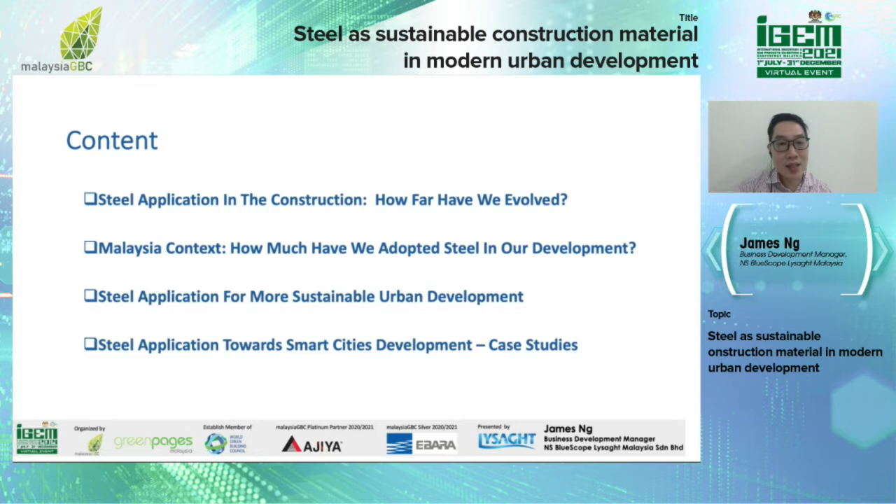These are the four contents that I'm going to share. First, steel application in construction and how far we have evolved. Second, the context of how much we adopt steel in our development. Third, more sustainable urban development. Fourth, steel application towards smart city development. Then I will share some case studies of how Malaysia is moving in this direction.

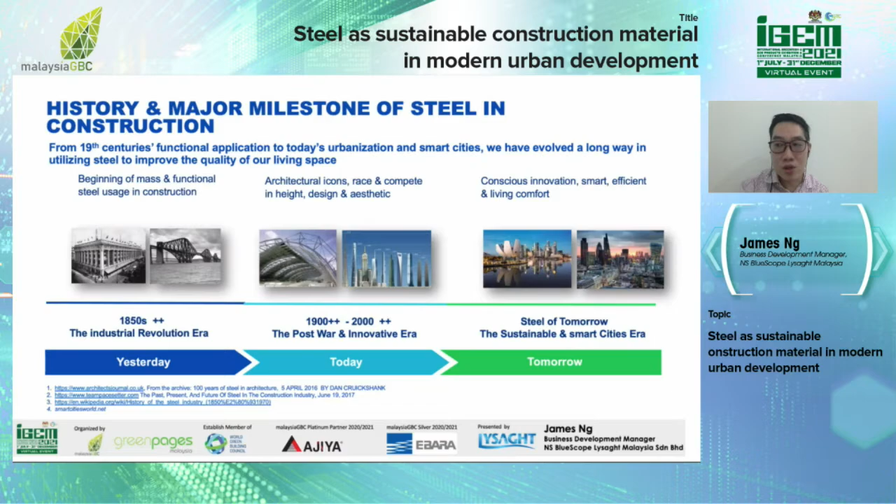First, steel application in construction, how far we have changed from the past until now. From the 1850s, we used steel more in infrastructure. Then from the 1900s, building development started involving steel structures. Now we are using more and more steel in the industry.

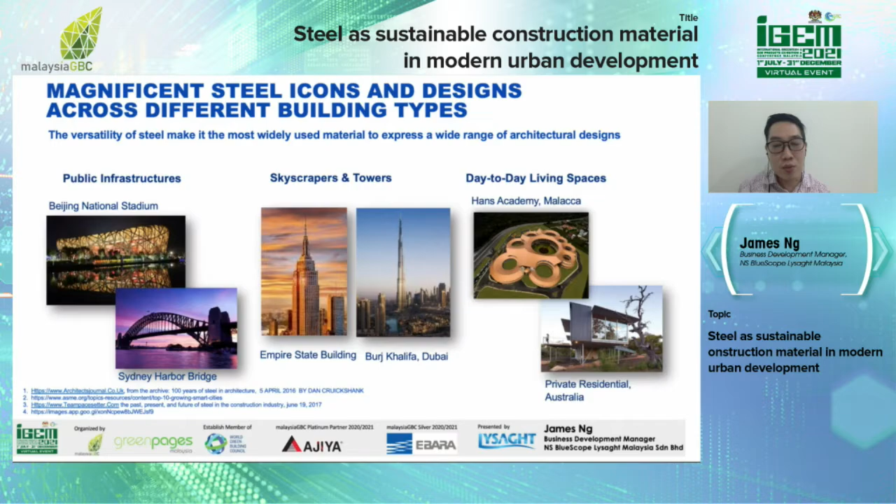Next topic: how much we adopt steel in our development. In the olden days, the kampong traditional generation, only corrugated metal roofs were used, along with timber trusses and timber door frames.

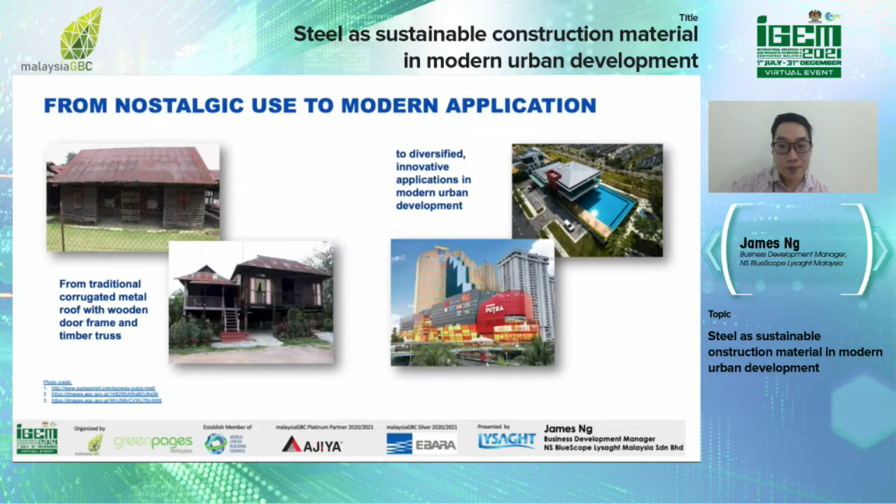Now in the modern generation, we have changed everything into steel material. The reason for this change is because steel has certain advantages, such as anti-termite properties. Steel material can be used in trusses, steel framing, floor decking, louvers, fencing, door frames, ceilings, facades, and so on.

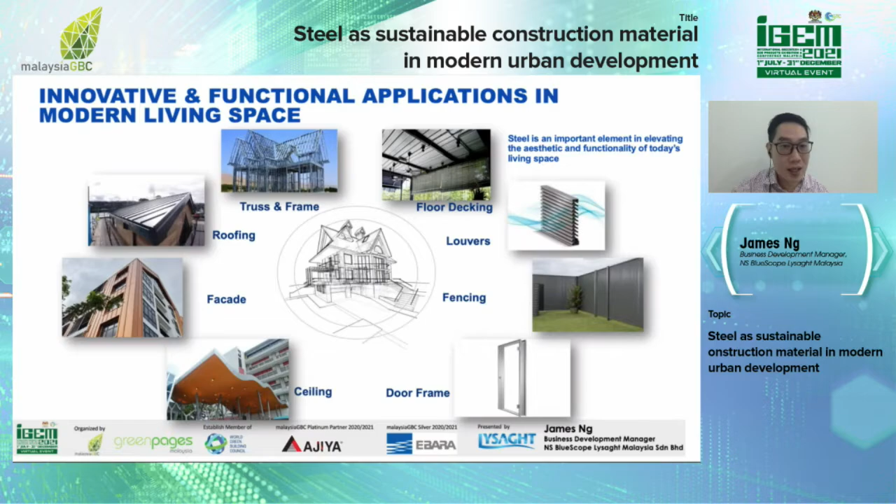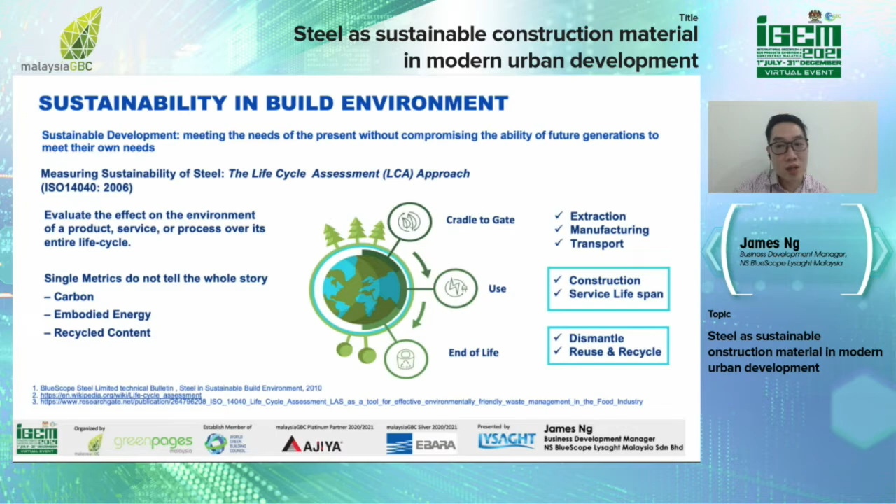Steel application in sustainable development: steel is one of the materials that can be recycled and contribute to sustainable development, such as starting as a roll from production. Then it comes to construction, where its service lifespan lasts longer. At the end of its life, once dismantled, it can be reused and recycled again.

The advantage of using steel is that it's lighter. Compared with concrete roof tiles, it's actually 9 times lighter than concrete roof tiles.

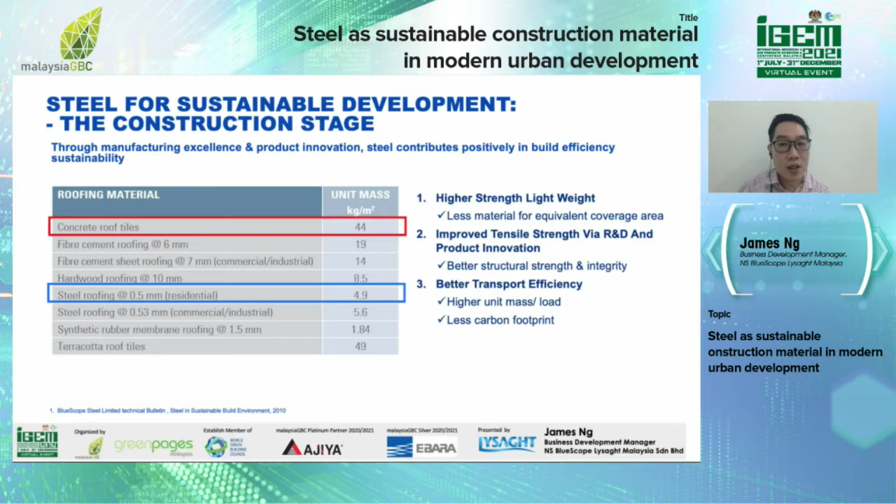First, you have higher strength, then improved tensile strength and product innovation. Third, you have better transport efficiency.

Fourth, it can be pre-cut in the factory and brought to the site, so there will be less wastage and less construction time consumed, and it's cleaner on site. Fifth is less interference to the surrounding area, less heavy equipment needed to hoist up the trusses and the rest of the steel material, and less landscaping costs also.

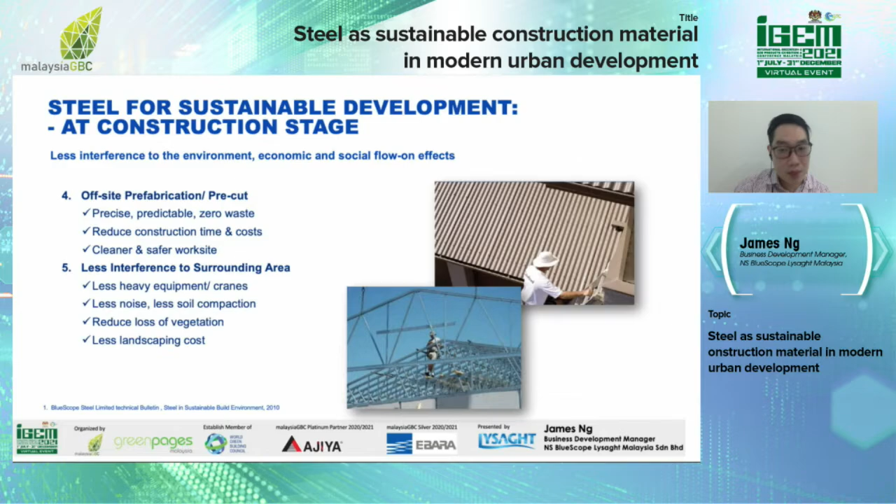Steel for sustainable development at the service lifespan stage - how long can it last? Longer lifespan with current coating and the latest technology from zinc, aluzinc, and magnesium aluzinc.

Previously they were using zinc, then they added certain aluminum and zinc into the coating, which we call aluzinc. Now in modern design technology, we are using magnesium, aluminum, and zinc coating together. This enhances corrosion resistance and gives more durability to the steel material.

Second, in terms of design flexibility, it can be flexibly curved and cantilevered, especially on the eave extension and so on.

Third, better space utilization - meaning you have more clear span, less columns to be used, less beams to be used, and it's lighter.

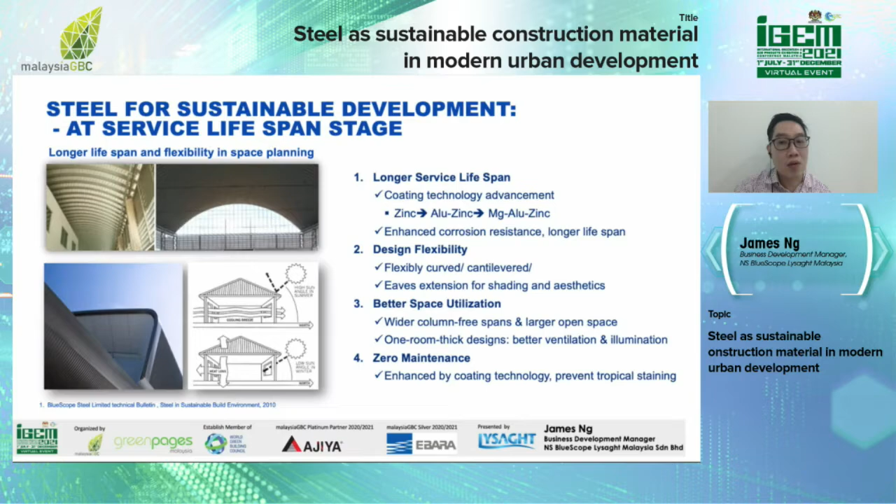Fourth will be zero maintenance. With current technology, you're actually maintenance free. With Colorbond material or any other material that you use, now you have self-cleaning processes.

The steel material also contributes certain thermal comfort to the home user or building owner - such as in daytime it absorbs heat, and at night time it releases heat faster than other materials.

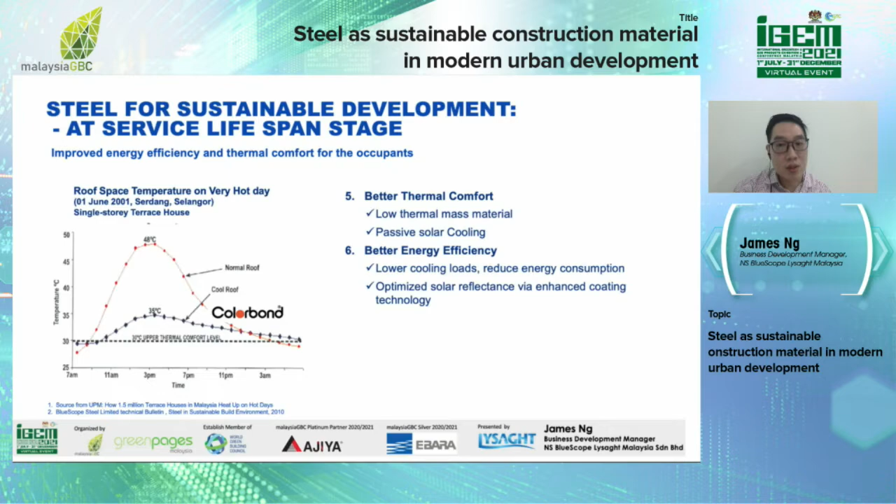With current technology, it also contributes certain SRI value, which contributes points to green building requirements. Sixth will be better energy efficiency - reduced energy consumption. Once you release heat faster in the building, you will not use as much air conditioning, reducing energy usage.

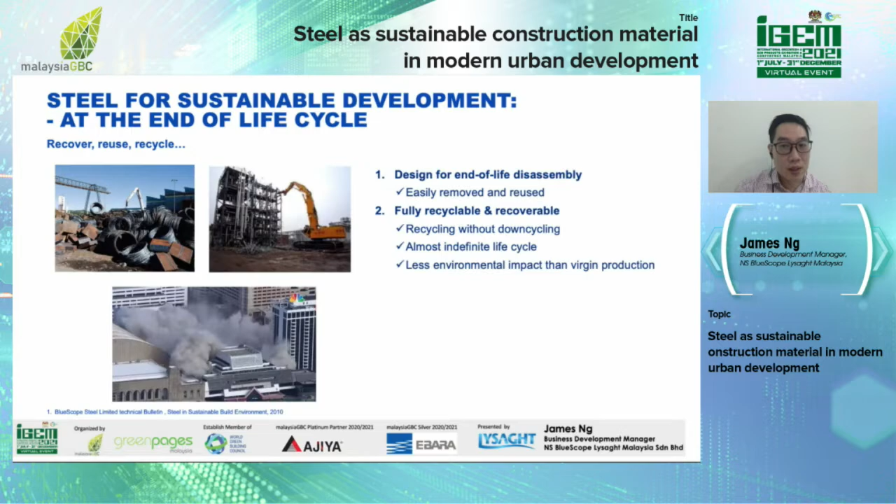Fourth, I'm going to explain about steel application towards smart city development. This is very important - with current technology, latest engineering design and everything, we have a framing system. Overseas, most double story or single story buildings have started to use this lightweight system, called an IBS system, or Enduroframe. All of this uses every single column and detailing made from steel material.

First of all, why we go in this direction - it's lighter in construction, so you save costs. When you're building lighter, you save on foundation cost. It's fully modular and prefab, with zero wastage. By using CAD and CAM software, you cut to the exact dimension, which helps reduce wastage.

It can be done in single story and multi-story, and can be easily constructed and deployed. Several benefits include flexible wall and floor options, and most importantly, it's termite free and fire resistant.

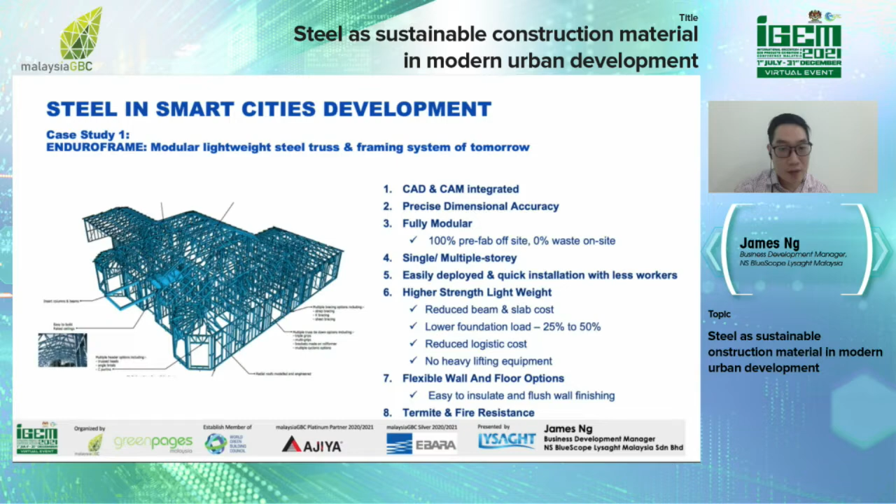Now I will show you some video regarding how it's constructed. You can play the video.

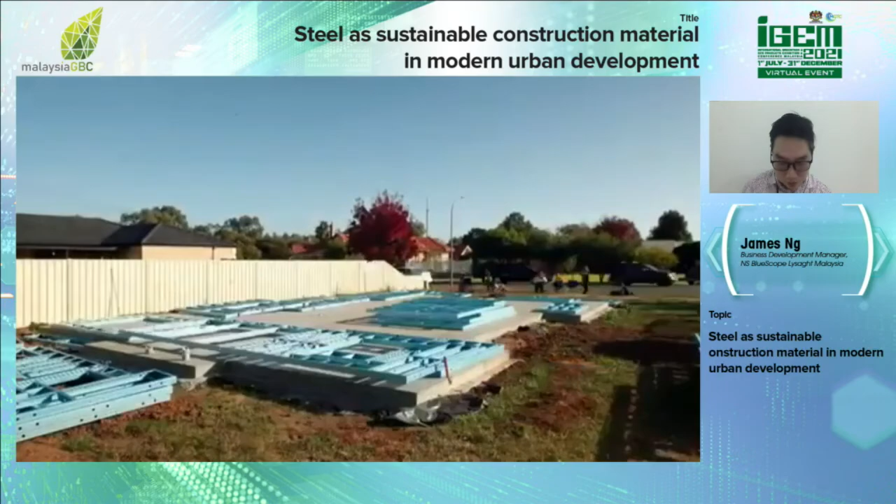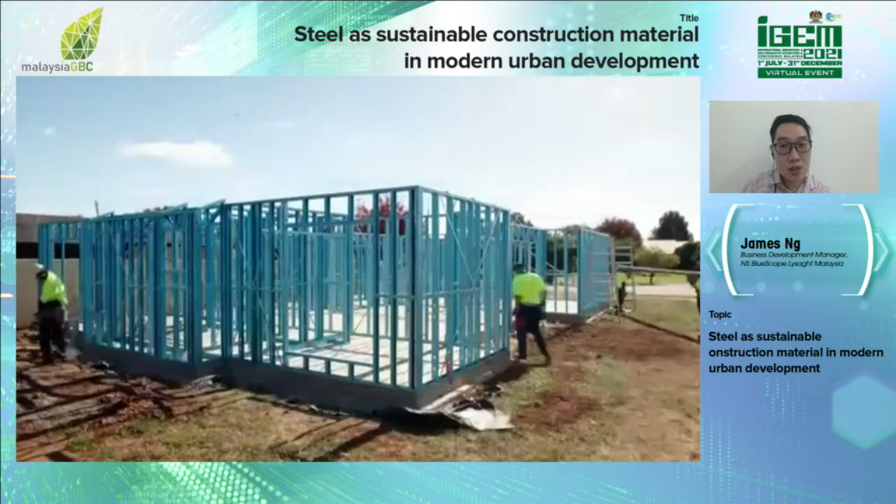If you look at this video, this building can be constructed within just a few days, so it can be done easily and faster. You can see less wastage at the ground, and you need less manpower - only about 10 people or 6 people to construct the whole single-story building.

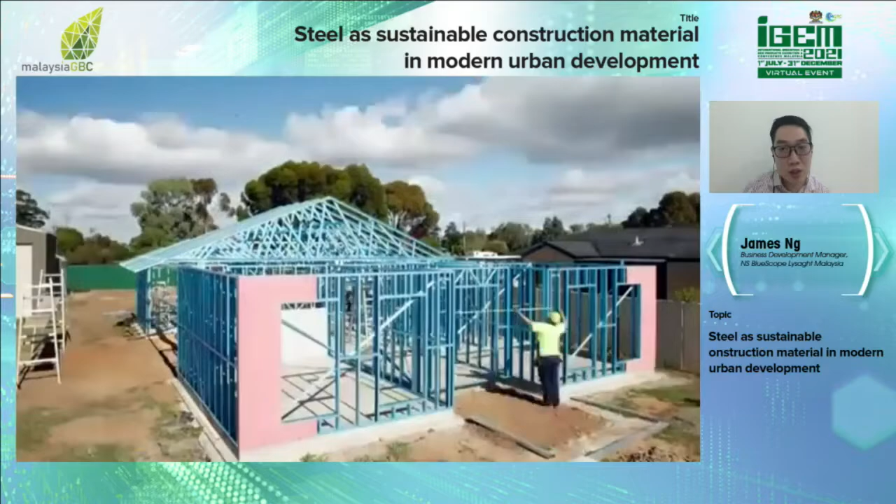And with the material, it can last about 25 years against corrosion and 10 years before color fading.

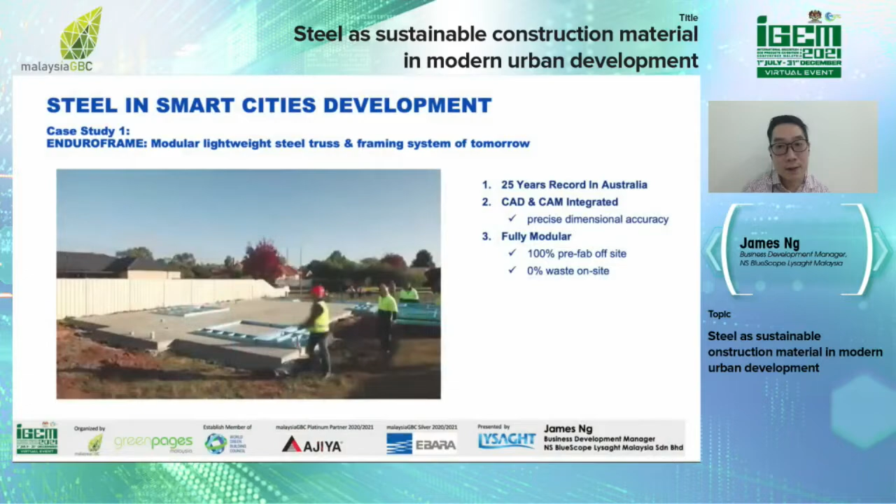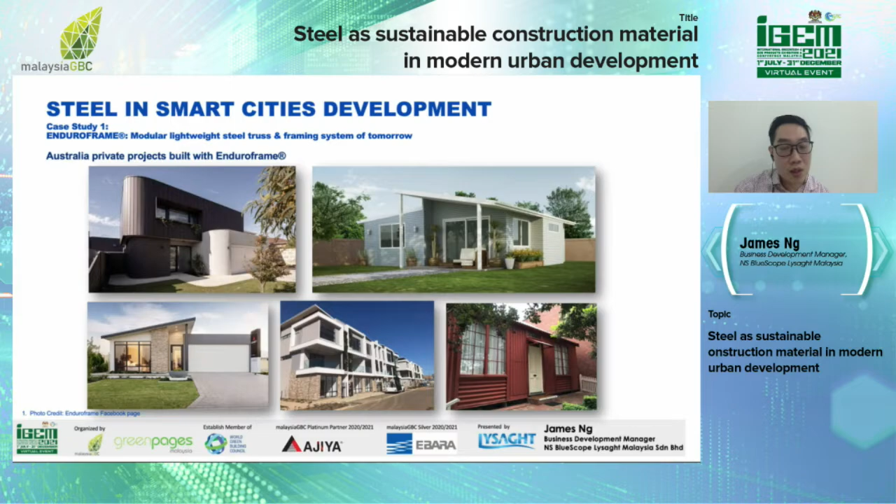Overseas, most buildings use this Enduroframe system, known as the IBS system. Currently, Malaysia is starting to adopt it - some schools and low-cost terrace houses have started using this Enduroframe system, or IBS system. These are a few examples of projects in Australia, where they've been using it for 25 years already.

This is also some of the example.

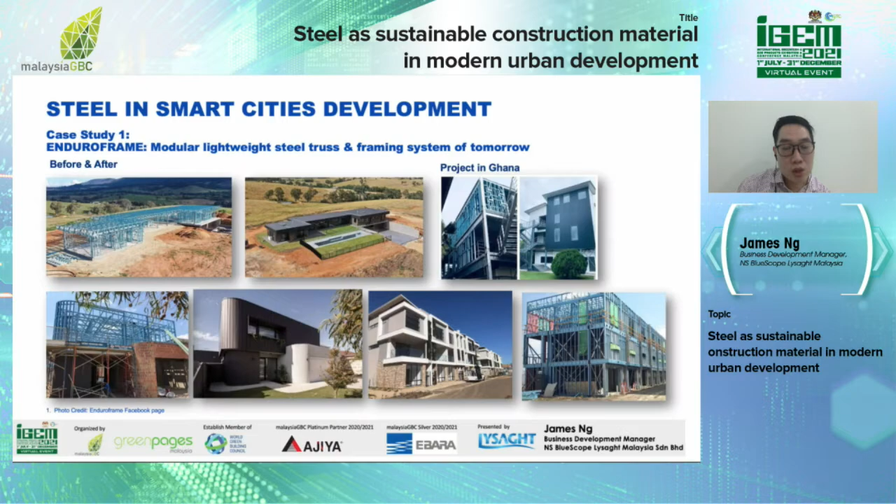A lot of people ask me, by using this IBS system, do you have any problem on the M&E conduit, ducting and so on? There's no problem, because based on the software design, initially they already design to cater for the M&E equipment or trunking to be constructed or installed. It's already in the system, already programmed. So no problem on that. When you prefab it and pre-design it, you actually limit the wastages, and you can limit any failure or defect.

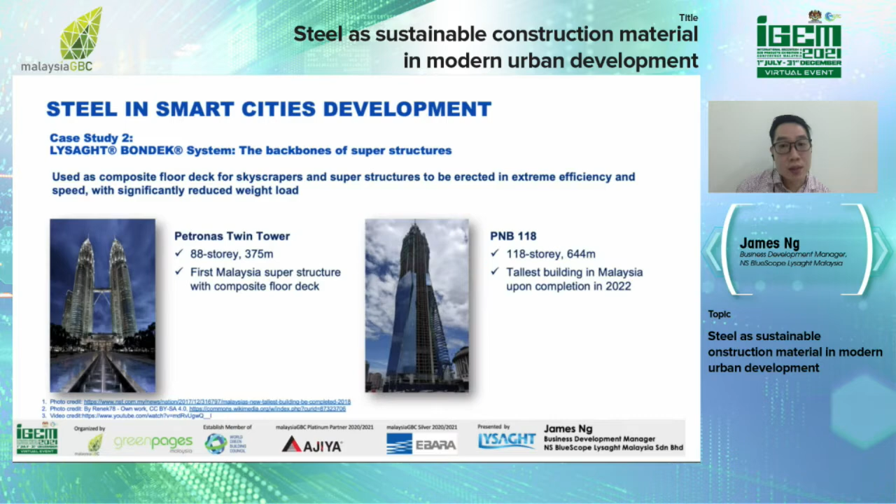Another steel construction that we always highlight is our twin tower. The whole building is actually using steel. Only the center part of the building is using the core, which is the concrete part, the main backbone of the building. For example, Petronas Tower is about 88 stories high, and it's using composite floor decking, which is Bondek. PNB Tower also the same thing - they are using structure decking.

Let me play a video of how TRX was built, and how long it can take. If using the conventional way, I don't think 19 months could be enough - it might take more than that, because you need to cast the concrete and construct the formwork. So let me show the video.

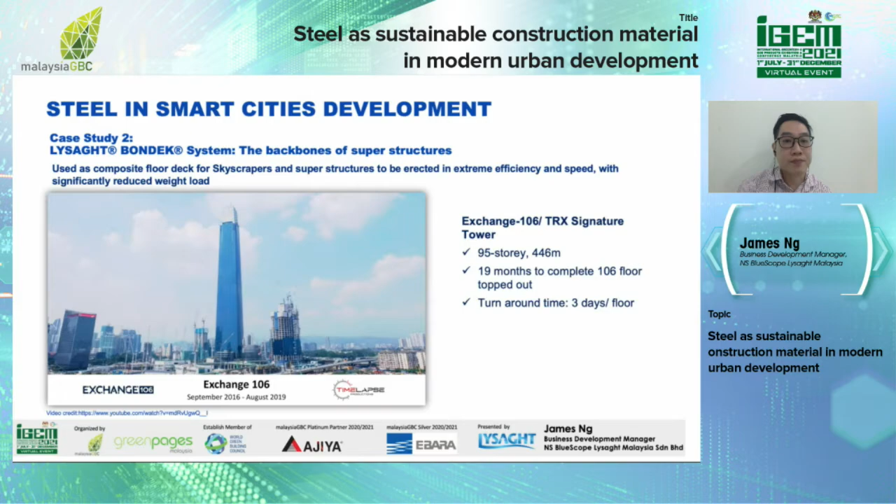By using this decking, structure decking - is the video playing?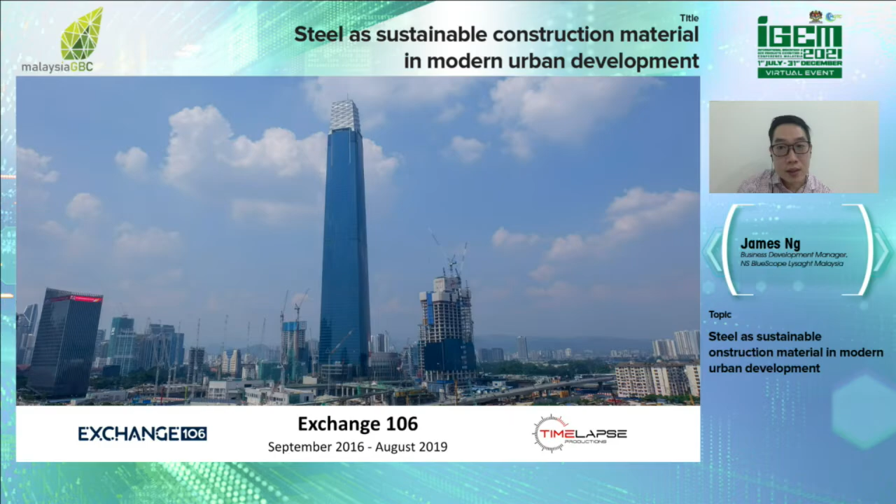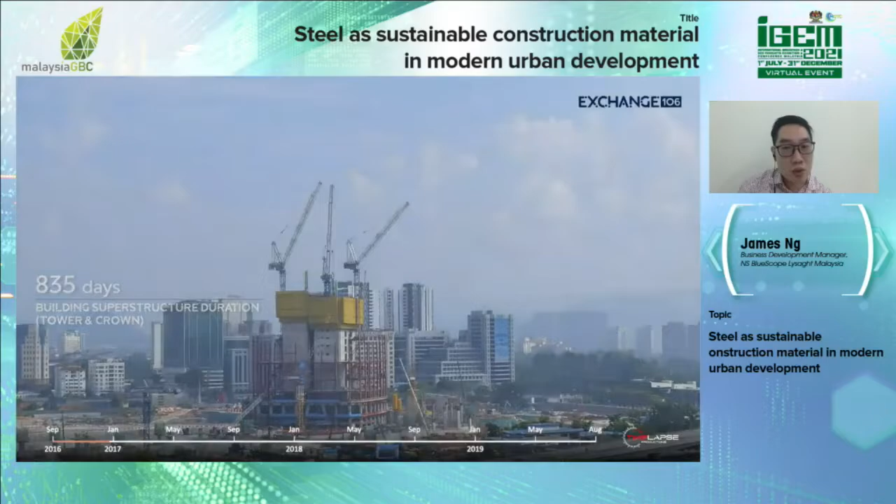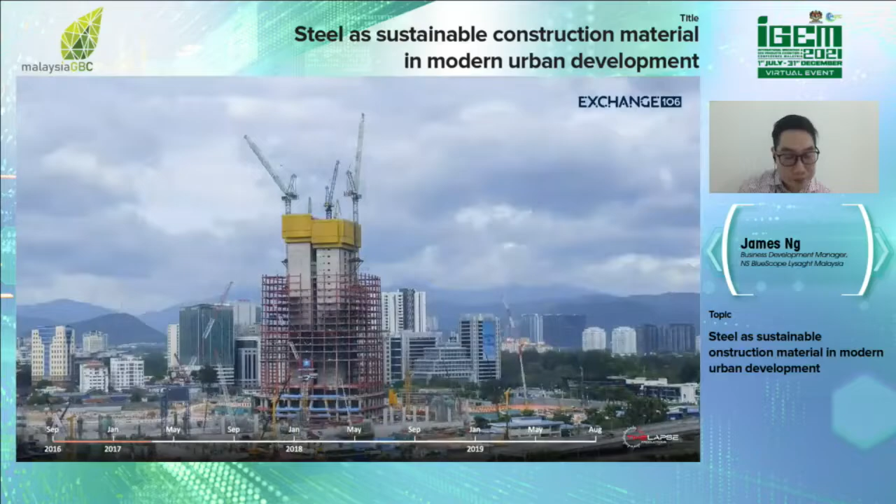By using this structure decking, you can construct the building faster. You can speed up the construction work, and the most important thing is that when you're casting your slab, you can do all your architecture work below that floor. So let's say for example the 5th floor you are casting the concrete slab, then the 4th floor you can start your tiling work or M&E work already. That's the advantage of using the decking - it helps speed up the construction.

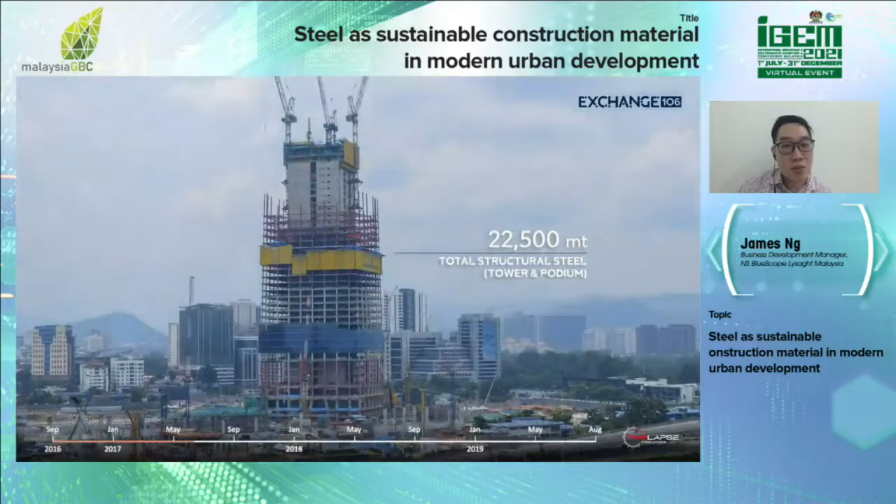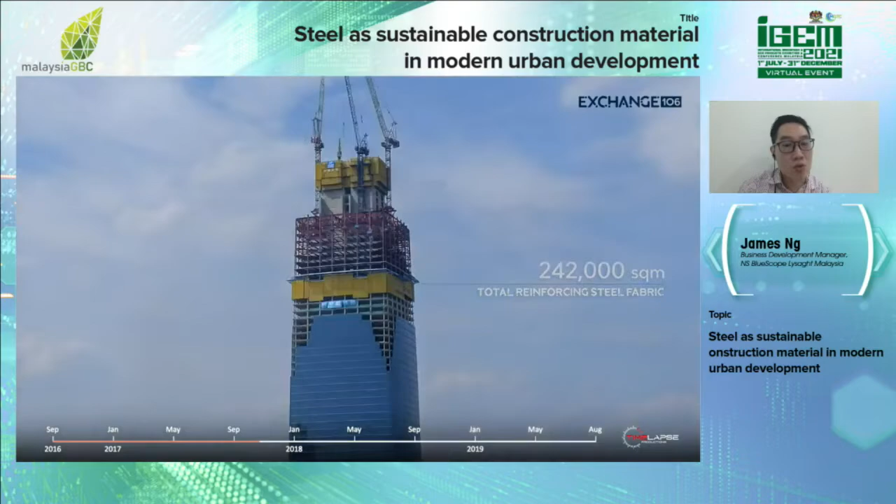The most important thing is it's lighter, and the foundation will be lesser. For construction that has soil problems or settlement problems, this will be a good choice for the engineer, because it lightens up the building. You will not create a heavy load on the building, and the ground can cater for that weight.

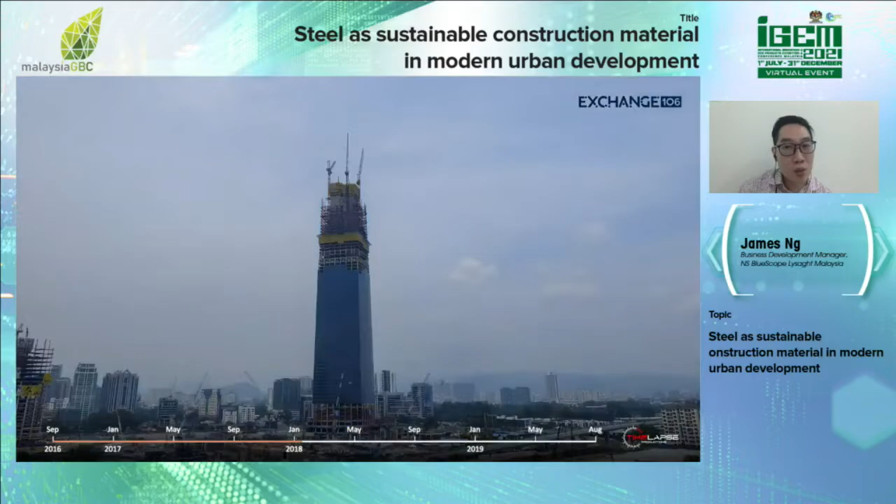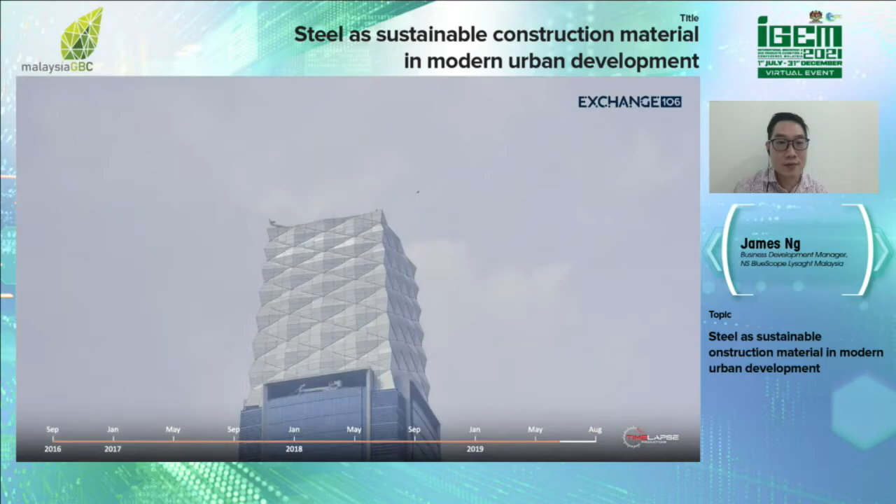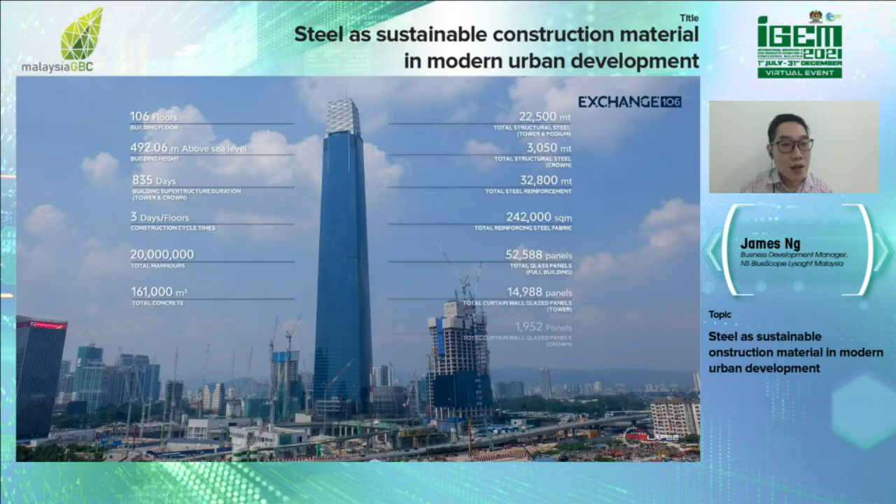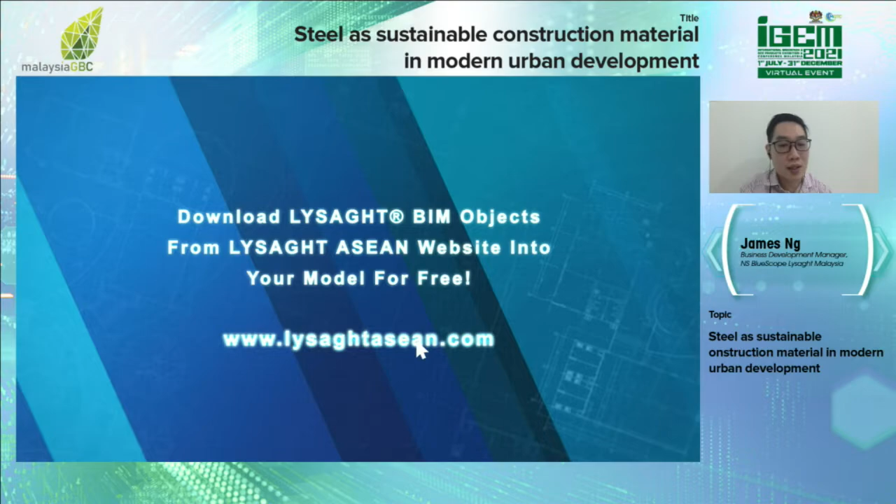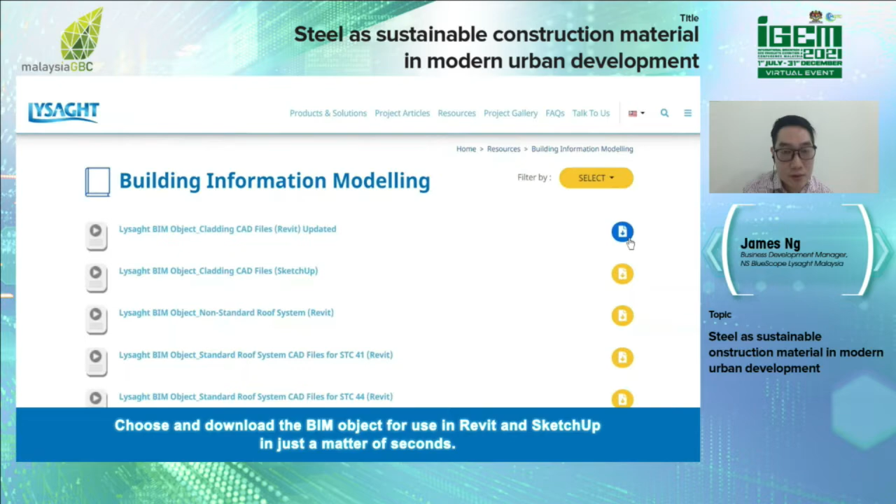What is BIM? BIM is actually building information modeling. BIM connects the team or workflow together, and all the data can be shared among all the consultants. The reason for using BIM is the life cycle of a building or infrastructure, from the design stage to the construction stage and to the operation stage. In BIM, you can have a hassle-free process - you can share your data among each other.

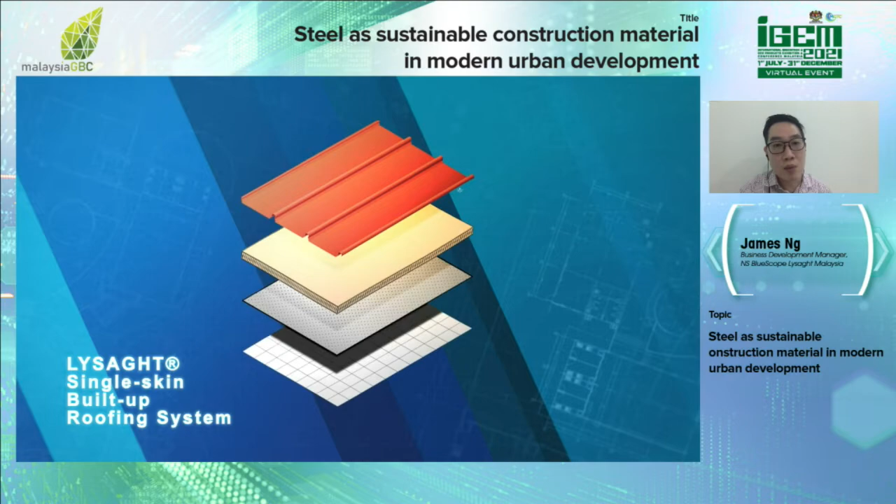It doesn't need to print out the drawing or anything to share with the other consultant. You can upload to the cloud, and every consultant can download it from the cloud and make amendments on the BIM. When they make an amendment, like if there's a clash detection problem, once they meet they edit it, and once they edit it, the other consultants can share among it. That's why we are going in this direction - BIM is part of the integrated software that's hassle-free.

Second thing, once you want to trace back the drawing, it's very difficult to trace back the hard copy or soft copy. By using BIM, you can just click, from version 1 to version 5, and know the pages of your drawing already.

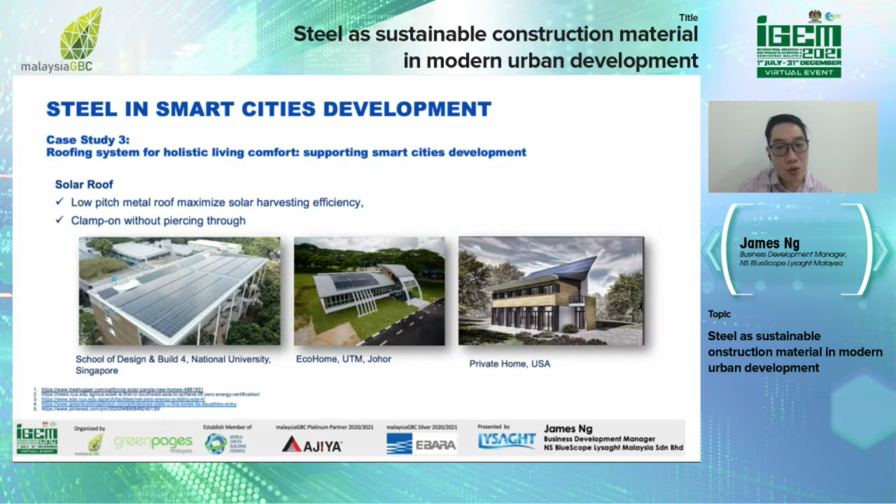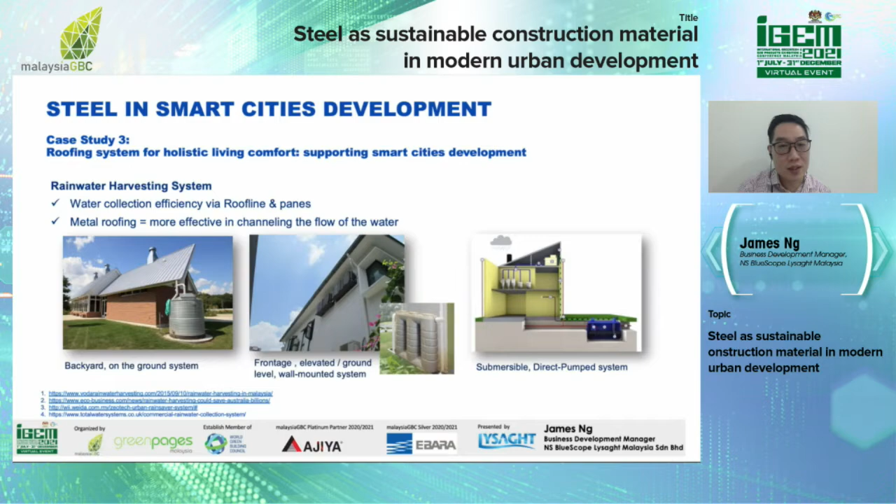Moving towards the solar direction, I would say metal sheet or steel sheet is one of the profiles that can collect more rainwater. You direct a channel back to the gutter and collect it. You can use clamping for the solar panel. As a metal roof has low pitch, you can collect more energy efficiency for the solar system by using a clamp to attach the solar panel onto the metal sheet. So rainwater harvesting is one direction. Metal sheet is one of the profiles that can collect rainwater, and it helps channel the water back to the gutter more efficiently.

Green roof is also one of it. The profile itself can help plant certain grass or green elements on top, and it helps drain out the water. We have artificial grass or real grass also.

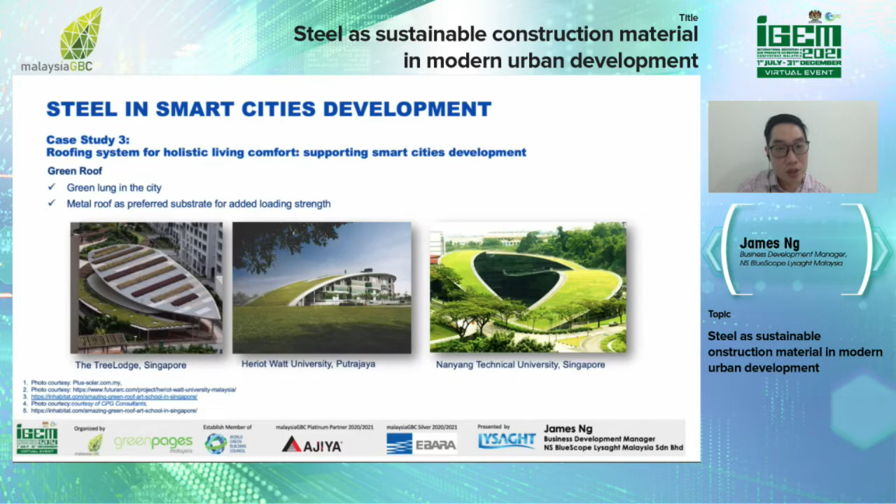To sum up everything, I would say we still build towards sustainable building, and it helps create better lifespan efficiency, and it's one of the materials with recycling efficiency. So for the future, we're actually going for rainwater harvesting, green roof, and solar roof also. So that's the end of my sharing. I'll pass back the time to the moderator.

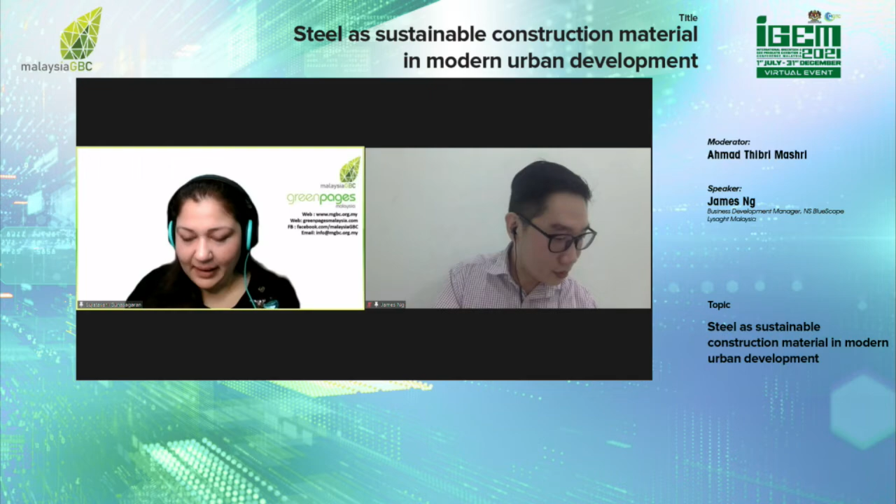While the participants are putting in their questions in the chat box, Mr. James, may I ask you a question? How do you see the cost comparison between the IBS system that Lysaght have compared to conventional concrete constructions in Malaysia?

Okay, first of all, the IBS system that we have, we are studying how it can save even more cost. First thing is it's lighter, and we look at how to cantilever further apart so you have a better clear span. Most designers would not like to have many columns, so we're looking at that. It definitely saves certain cost and contributes certain points on the IBS system.

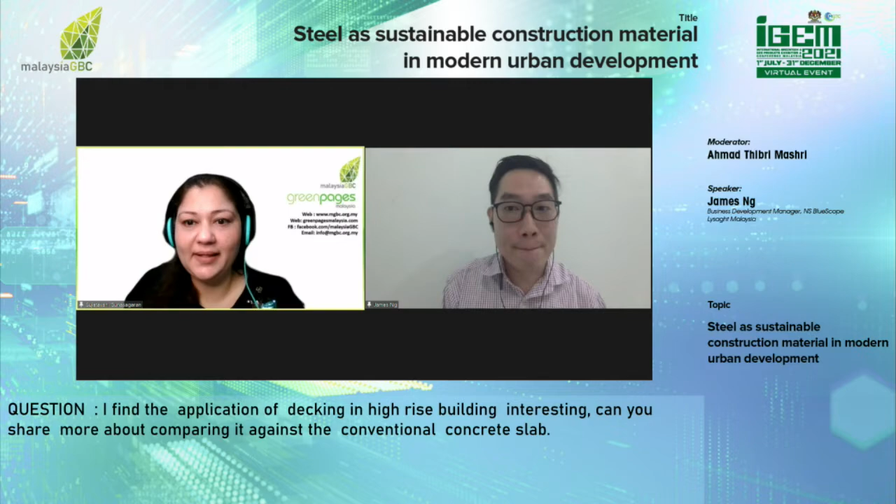You mentioned that your company is going towards, or probably have established, BIM. So I believe all your products are BIM-ready components for designers to choose from. Yes, all our products, including our profiles, our trusses, our Enduro frame, we're going toward this BIM direction, and we have our BIM objects ready anytime for the consultant and designer. Anytime they can download it from our website or request it from our person, or they can call me up and I will send them the object. To a certain extent, if you need us to help on detailing, especially on the fascia part or whatever detail you need, we're able to use Revit to generate the detailing for you.

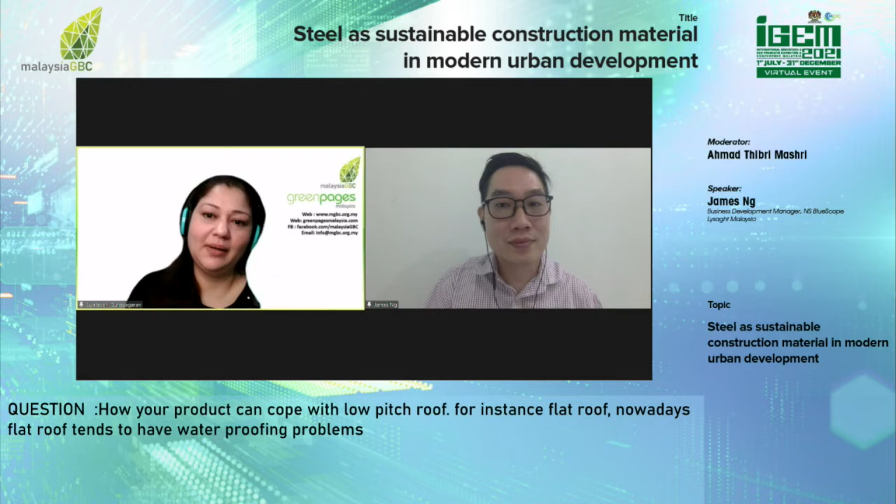Another question from me. You mentioned just now that steel can be recycled, and we know that for a very long time it has been a very profitable business to recycle steel, and it has been highly recycled. Can we hear from you how Lysaght approaches the recycling of steel?

Recycling of steel, we actually go back to the raw material steel supplier. Normally, some of the steel can be melted back and formed again into flat sheet form. For further detail, we will need to look into that, and maybe we can give you more information after we have more data on that.

Just now, you mentioned that we can actually construct a building within a very short time. Could you give us a time frame for probably a 2-story house? By using steel, how fast?

It depends how complicated the design is, and it depends on the requirement of the building or house. But normally for a single-story house, it can be constructed using steel framing in about 15 to 20 days for all the steel construction to be up.

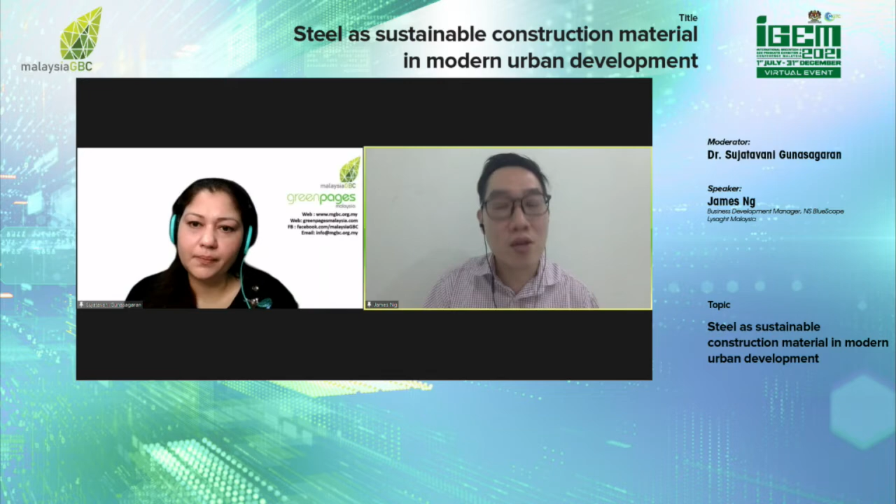Some people might worry that by using steel it will collapse or not. Based on engineering calculations, we really cater for all the safety factors and loading effects to design 2-story or 3-story buildings using steel construction. That's why our R&D department is going towards another level, trying to use steel construction in 5 to 6-story buildings. We are doing R&D on that, but for 2 to 3-story buildings, it's definitely not a problem already.

It's really good to hear that your R&D team is pushing towards cost efficiency and also fast building. That is really great.